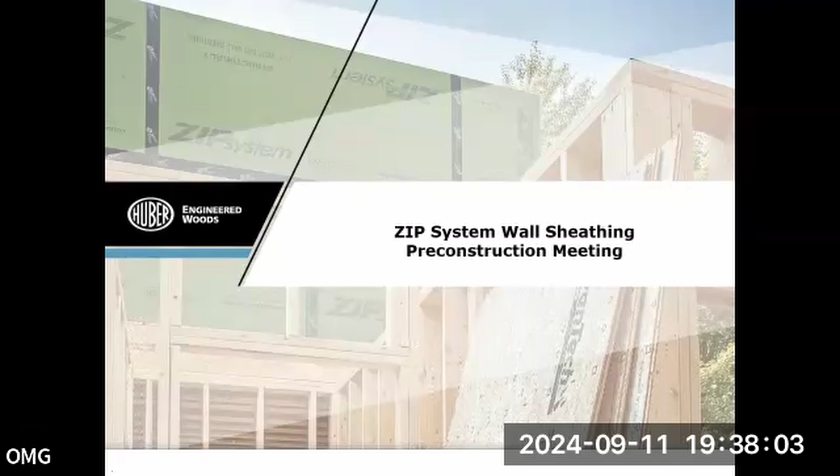We got our start as an organization, probably a 40 to 50-year-old company at this point, HEW. But HEW is a smaller subsidiary of J.M. Huber Corp, which is a 140-year-old privately held company, right? Very old for America, very old company. Got started in the chemical space. We're big believers in ethical behavior.

Everything we do is to solve a problem. Our first product we ever launched really as a wood company is called AdvanTech. It's a subfloor panel, it's OSB. But the problem you had with most wood panels at the time was that they were made with water-soluble resin. So during the construction process of a new structure, there's going to be water that sits on that house. Doesn't matter if you're Ryan Homes and you turn the house over in 83 days, or if you're some custom builder and let it sit for 1.5 years between foundation and when you close, that panel is going to get some water on it. And the issue was that water, if it's a water-soluble glue, will rinse out of the board if you let it get wet for long enough or wet enough.

So we said, there's got to be a better way to do this. We started putting basically hydrophobic resins in with wood. And turns out if you do that, you can get panels that can stay outside for long, long periods of time and still basically be structurally brand new.

That's how we got our start. And everything we've done since then has been: this is a problem, let's figure out how to solve it going forward. We believe in ethical behavior and trying to make the world a better place, mostly through better products.

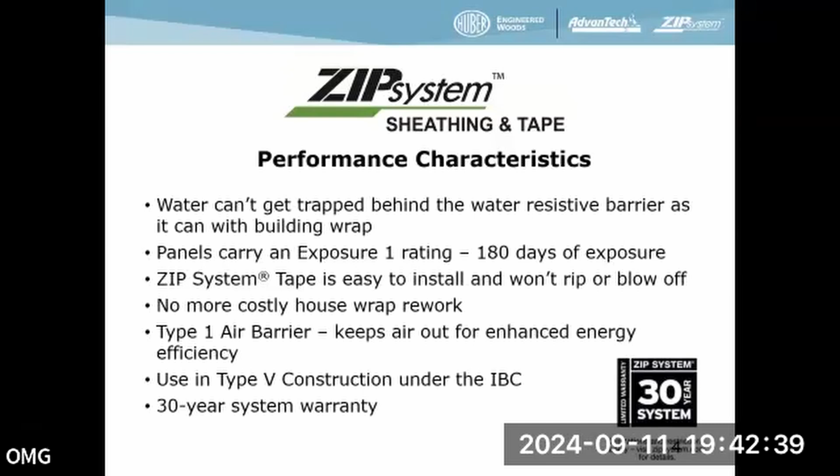Tape - we oftentimes see a zip system with Tyvek tape. Yeah, that's a bad idea. So there's 3 different species of tape.

The first species I used to see was asphalt - I used to be a roofing guy for a little while. There's asphalt tapes, there's butyl tapes, and then there's acrylic tapes. I used to think acrylic tapes were garbage, and the reason was because the only acrylic tape I was aware of at that point in my career was the house wrap tapes, which look basically like packing tape.

So you're gonna mail something to one of your cousins or kids for Christmas - the problem with that tape is it's only 0.8 mils of adhesive. So if you have an acrylic tape that has more adhesive, it'll stick better.

Asphalt tapes off-gas. They get warm - it doesn't matter whether they're covered or not, the fact that they get warm means they're going to off-gas. And when they off-gas, they start losing a lot of the capabilities that made them good tapes to begin with. So if you've ever pulled out a window or worked on a roof with an asphalt tape, after a certain amount of time it's extremely brittle. You know, there's that whole saying: there are two kinds of windows, those that leak and those that will leak.

You have this issue with tapes that are not long-term durable, even once they're covered. Butyl tapes are okay in some cases, but most butyl tapes aren't 100% butyl. They have other additives in there, and when they have other additives, they still tend to off-gas. Normal butyl can be long-term dimensionally stable. This is what I thought was the gold standard of tape for the longest time, the butyl tape.

When you get an acrylic tape, though, its weakest point is when it's first adhered to the board. When you put it on the board, that's the weakest it'll ever be. Whereas with every other tape, you take a piece, put it on there, and pick it up, it's lost almost all of its adhesion capability. If you try to put it back down, you're going to have major issues.

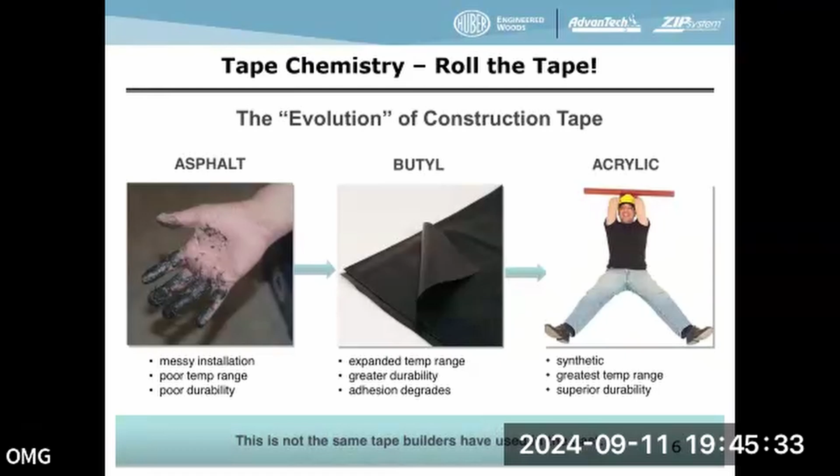When you first apply the tape, people tend to just smooth it on with their hands. You get about 40% of the bonding adhesion you're going to get that way. If you want to increase it, the best thing you could possibly do is roll it. People think they can just push it on with their hands because they're a mason, or a carpenter, or they've been working for 40 years and their hands are hard. It doesn't matter.

Your hands have fat, your hands have flesh. Have you ever tried to press out cookie dough with your hands? If anyone's baked cookies with kids, a spouse, whoever—you try pressing it out and you get really uneven results. Take a rolling pin, even without a lot of pressure, and you get it much more even. The reason is your hand yields—it's not consistent, it's got fat, it's got flesh, it's not all bone.

If you look at a panel, or really any surface, under a microscope, you'll see it's not flat at all—it's got all these ups and downs. What you're trying to do is take all of this adhesive and push it in. This tape is about two-thirds adhesive. It's 12 mils thick, and 8 of those mils are adhesive.

That's 10 times the amount of adhesive you'd find in a roughly equivalent house wrap tape—Tyvek, Typar, things of that category. What you're trying to do is push all this adhesive into all those little nooks and crannies, like an English muffin—just get it all in there. If you just push it on with your hand, you're not going to get that. So you roll it, and even with a relatively moderate amount of pressure, about the same as you'd use to paint a wall, you can get a lot of those nooks and crannies filled in.

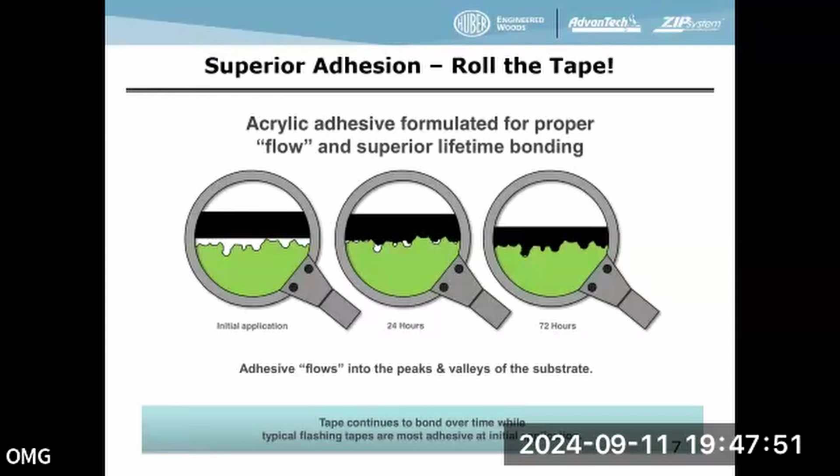There are lots of rigid rubber rollers out there for various different scopes in the building industry. There's no reason you couldn't use one of the ones used for welding rubber roof membranes or other things like that. So the taping is important. Rolling the tape is the most critical part. You can get all the other details wrong, but if you roll the tape, you're probably in pretty decent shape.

So what we're going to do here is run through this real quick. This is our commercial installation pre-con. We go through this with people when they're about to build an apartment complex. The main idea behind this presentation is we're going to talk about all the details that could be out there, all the areas where you might have a trouble spot, so you can talk through those details. Then I have a little quick presentation afterwards that says, if this is going wrong, this is what you do. So we'll go through that.

All wood panels are supposed to be gapped. These are wood panels, nothing particularly special about them. They're a little stronger, called a Structural 1 panel, so they're stronger than a typical panel you'd get in the industry. The biggest difference is if you push on the panel in between two studs, it's going to bow less. It's more rigid. It has slightly better resistance to racking. So you do get some values, but this isn't a high seismic load unless you're building in a couple key areas or out near the ocean.

In this general area, that wind loading isn't even that big of an issue. So mostly just remember, treat it like it's a regular wood panel, you'll be fine. It's stronger than that, it can handle more than that, but just treating it like a regular wood panel will be okay. And almost all this stuff around gapping is code-based.

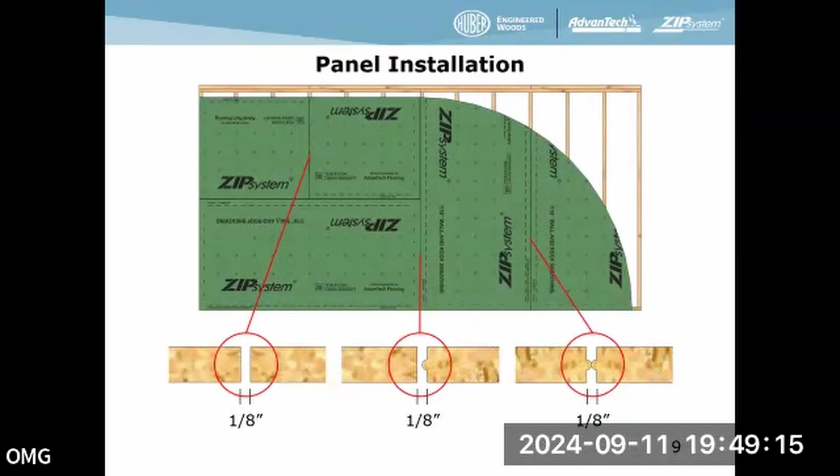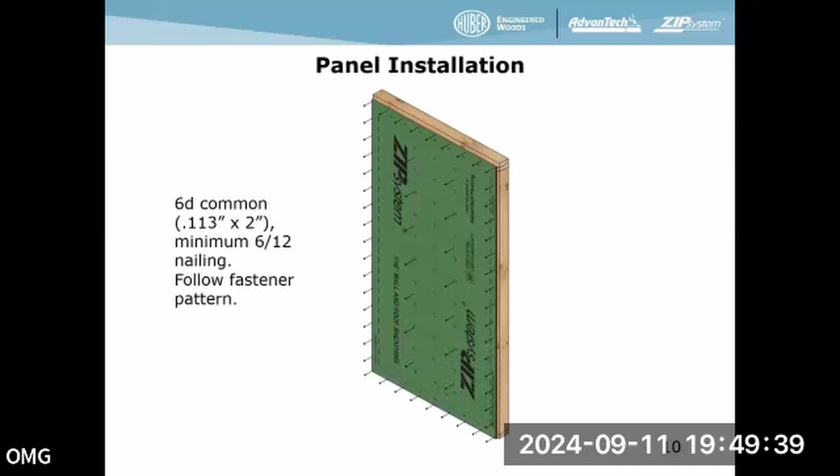The biggest complaint we hear, the biggest headache from inspectors and code officials and people who do code inspections on houses for whatever municipality they're in, is overdriven fasteners with our system. So this is the logic behind this complaint: your WRB is here, your wood panel's here, your studs here, right? If that fastener penetrates through the WRB at all, even a little bit, it's going to cause issues. You're going to get moisture into the envelope, there's going to be all sorts of problems. That nail needs to sit at best flush or on the surface. This is the logic that is there to protect the WRB.

It turns out it's nonsense. If you do any real testing around it, the amount of pressure you'd have to put on this nail head would be the equivalent of having 20 feet underwater. And if you have, I forget what it was, like 20 inches of rain per hour and a 230-mile-an-hour wind on an unexposed surface, that will also cause it to leak. It turns out if that's the case, you have much larger problems. So it's not a real world test. You can make anything fail, but the level this stuff fails at is really, really high.

In a real world application, we pay out anytime there's an insurance problem. People look at our panels, there's some kind of failure with a floor, wall, whatever, and people are concerned about its performance. We almost always just write a check. We aren't legally required to. I'm not going to say we should do it - we probably shouldn't write some of the checks that we write, but we do. We want to take care of people. We believe in our product, we stand behind it. We have never, in the entire time this product has been available on the market, written a claim on an overdriven fastener, ever.

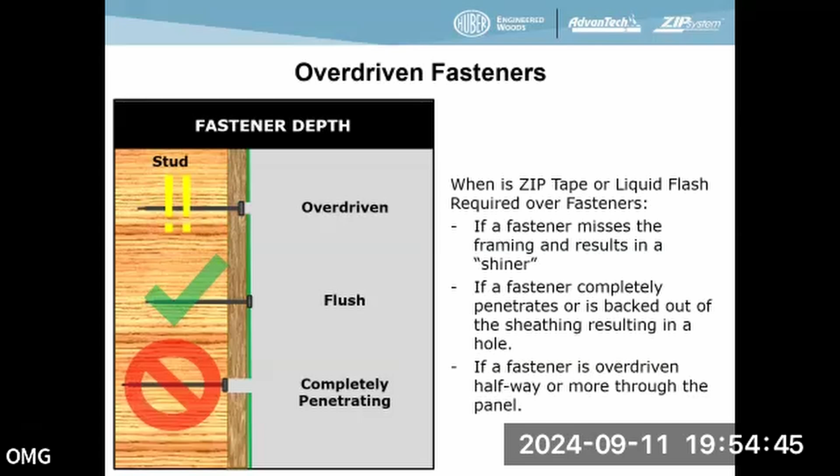When people are installing tape, almost all these details involve tape—you're going to get sick of looking at tape. But there are two kinds of joints where tape comes together. Any T-joint, you want a 1-inch overlap. The easiest way to think about it: there's a seam behind here, running this way, with a seam right here. When you take the vertical of that T, just stop it at the seam and run this across. There's plenty of slop in there, but the rule is you need at least 1 inch.

For end-to-end joints, use 3 inches—the best way to think about this is a slightly over 3-inch tape, about 3 and 3/4 inches, making it roughly a square. So visually, when you're looking at it, it's about a square when you stick the tape up and run it along. You'll be fine.

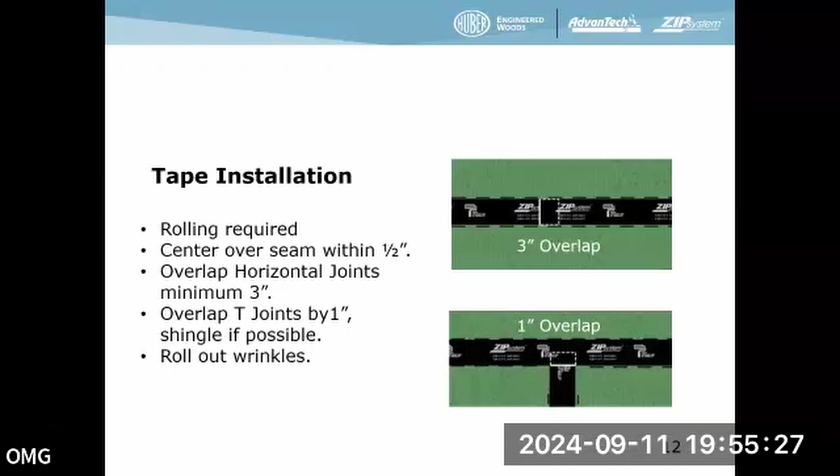This roll of tape is gonna be on everything because it's the most important part. If you don't roll the tape, you're likely gonna have issues you would not have otherwise. And if you do a lot of other things wrong but you roll the tape, there's a pretty decent chance it won't actually materialize into a real issue.

This right here is the worst taped thing on any wall. On any wall you walk out, you want to know whether the guy or gal installing that tape knew what they were doing when they did it. You'll look at that corner and see how well it's done. It'll be tight to the corner, and there won't be a lot of wrinkles.

One of the things that tells you they really understood what was going on, they probably were trained by someone at one point, is it won't just be one long piece running top to bottom. Turns out that's really, really difficult to do on an inside corner. They'll do it in about half wingspan lengths, 2 to 3 feet. You see a bunch of 2 to 3 foot sections that are shingle lapped. They start at the bottom and work their way up the wall, and it's nice and tight into that corner without a lot of wrinkles. That taping crew knew what they were doing.

I'm not saying you back off, but just know that's what that means. This is a really good indicator. You want to save yourself some time, start there. Just go find an inside corner and see how well they did with it.

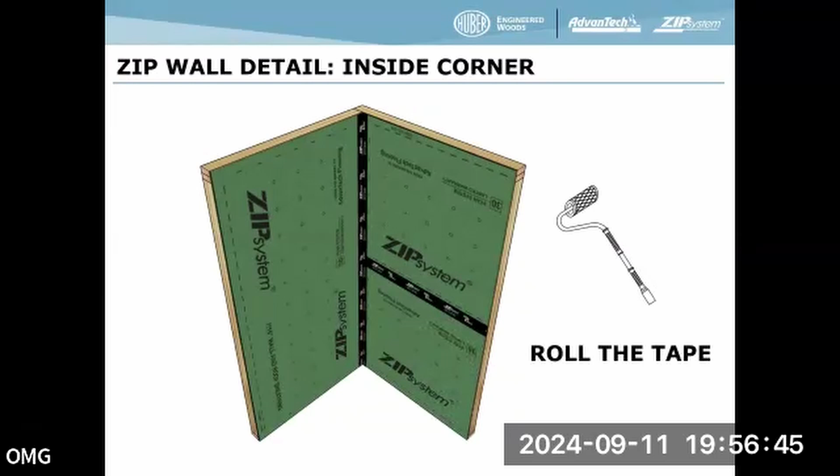Outside corners are much easier. You just tape down one side and then fold it over onto the other side.

One thing you'll see with this, and this started to become more relevant as the energy codes are changing, continuous insulation is becoming more prevalent, especially in DC and some of the higher end communities around here. We have a product where it's the zip panel and it has a polyiso insulation panel on the back of it, so it's installed as one panel that gives you your continuous insulation.

The biggest issue with these outside corners, once they start using continuous insulation, is if you butt two panels together, you start having this void that's not a nail base. That polyiso foam is relatively rigid if you push against it, but it's not something you can nail into. Nails just pull right out.

So what do you call that material? It's a continuous insulation panel. It's a zip R, R sheathing, R value. So zip R - that's the biggest issue we're dealing with on outside corners.

Outside corners are relatively easy to do. You can tape a 40-foot corner with one piece of tape if you wanted to, if the person had a ladder and was willing to do it. They'll take one side and come down the other, but in general, not a huge area for concern.

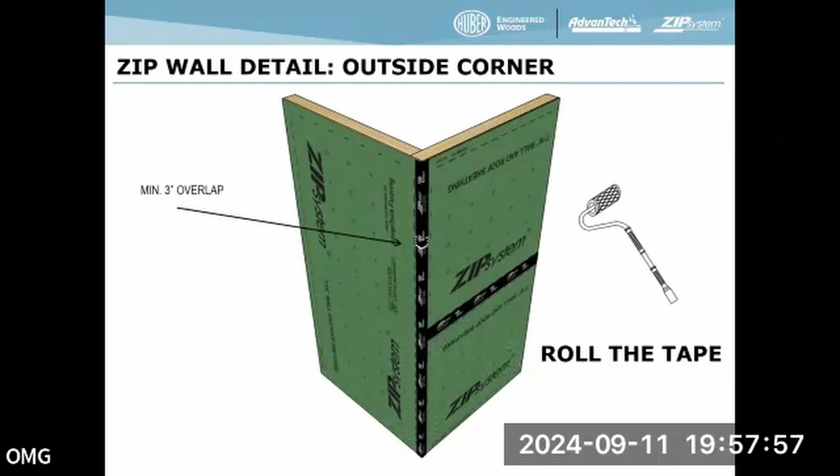Just like the regular seams, once you start having penetrations, anything bigger than the rule of thumb we have for what we call flesh wounds - so you have a cut in the panel, and you can't cover it with a quarter or your thumbnail, you should tape it. When you can see the wood through the green, even if it doesn't go all the way through, you should tape it.

Sometimes that's someone got a little overzealous with a compressor and put a bunch of nails in one area, managing to break off a flake of wood in between them. Maybe someone used it as a sawhorse and put a big old gouge through it. Maybe someone got a forklift and punched a little hole through it.

If you start getting less than 2 inches in diameter, you can just repair it with tape. Once you start getting bigger than that...

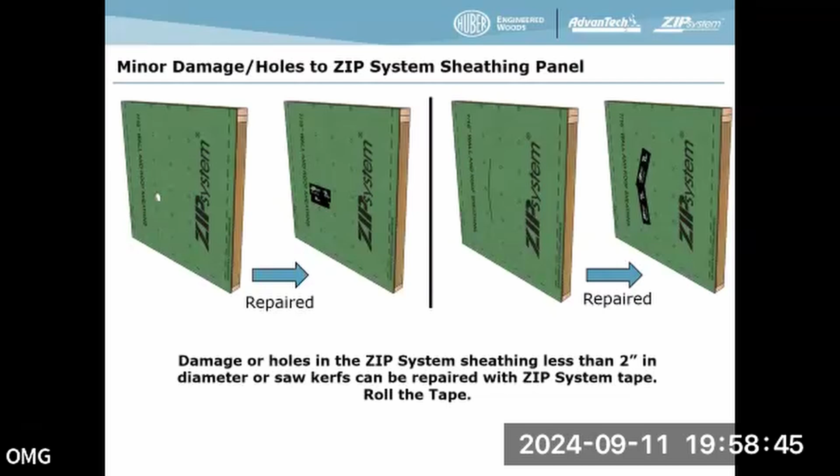It's time to start removing a section, blocking, and installing a whole new piece. Our rule is basically, if you can put your fist through it - or sorry, if you can't put your fist through it, you can probably just tape over it. Anything bigger than that, you're going to start needing to cut out a section and retape it in.

One of the worst cases we see for this is up in the top of gables. They build a house and install the panels on the ground on the end truss. They will then punch a hole through it, like with a hammer, with their fist, headbutt, or whatever. Then they'll put a chain through it, crane it up, install it normally, and it'll all be taped already.

So they don't got to go up there with tape to fix anything because it was all taped on the ground. It's a great idea, by the way. But then they get up to the top and there's this hole that just sits up there. Now you start talking about like, well, it's technically in an unconditioned area, into the attic. Are we worried about the air? Are we worried about, there's all these sort of what ifs. Don't do it that way.

Have them cut the top section out, remove it, tack it right below where it's going to go back in, just cut it. Then when they put on the roof sheet and the guy leans over, he's already tied in, already up there installing it, leans in, pops the thing off, puts it where it's supposed to go, nails it, takes off the tape, puts it down, rolls it, and walks away from it. He's already up there, it's already easy. He doesn't want to bring a saw up with him, so just cut it when it's on the ground, tack it right next to it, be super easy.

Again, you see a detail like that, that means that crew's done this before. That means they've thought about it. They've really, and they also care, not just that they've done it, they care to get it correct.

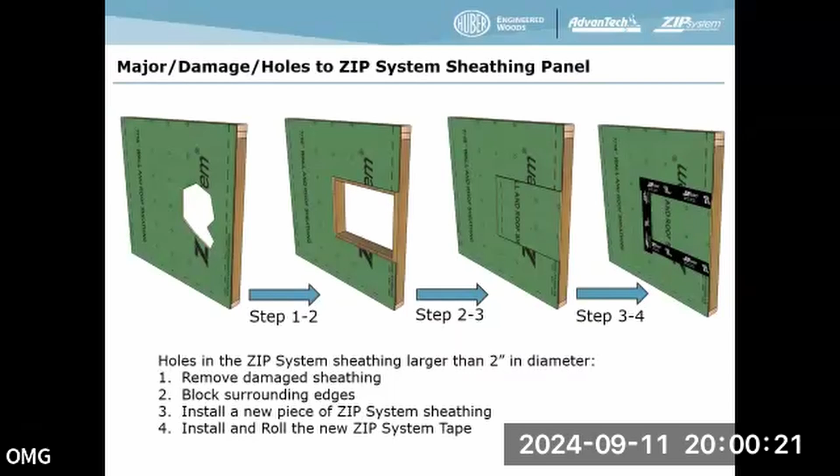Yeah, this is one of the bugaboos of the industry. There's not really an official code requirement on how you treat this area on any wall, right? What do you do when the wood comes down and meets the masonry?

Mostly around here, it's like basements, not so much crawl spaces. There's some, but you get on the shore, you'll get more of those pier-based systems. But right here, there's a bunch of things you can do.

Best thing, really, is liquid flash, a fluid applied system. Cover that joint. Tape's not really going to adhere to the masonry very well. It will if it's dry and clean and free of debris. That's no concrete I've ever looked at on a job site would meet any of those requirements, let alone all at the same time. So you can do a couple things.

Fluid applied will stick to brick and masonry just fine. It'll stick to you just fine too, so be aware if you use the stuff, it's messy. You're gonna have a gray splotch if you get it on your arm for at least 2 weeks. But the other thing you're getting when you use the fluid applied is it's helping with your air barrier.

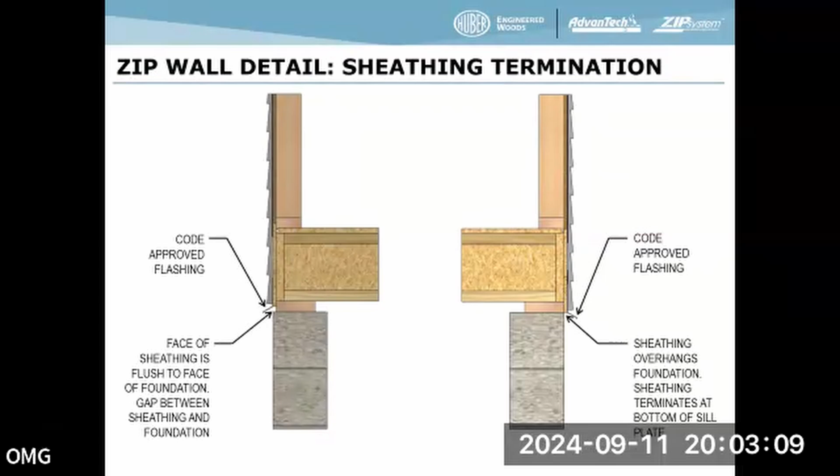If they put a sealant down below the sill seal and on top of the sill seal, it will keep it relatively airtight. If they don't, you could spray foam behind here, that will also help solve that problem. Or you could put a WRB compatible flashing that also breaks up the air movement, which is what the fluid applied is. So there's a lot of ways to skin that cat.

I'm going to flip through these because it's a lot of the same stuff. There's basically three kinds of things you can use to tape a mechanical or physical penetration, like a beam, a pipe, a wire, or an HVAC conduit or vent.

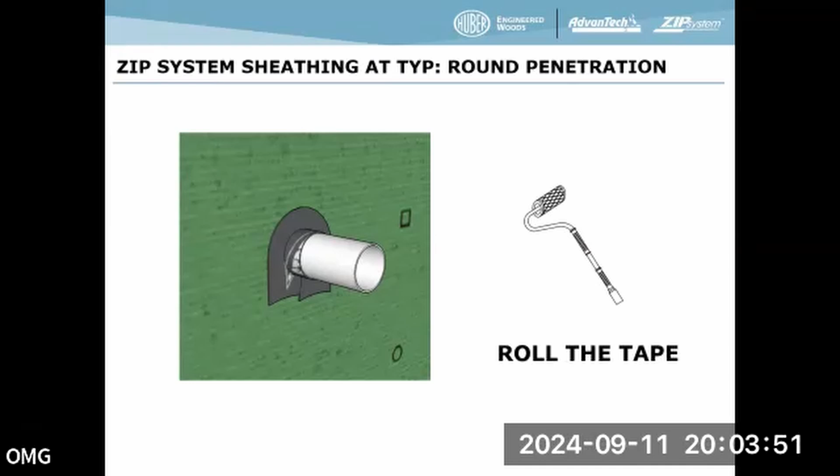You can use a regular seam tape if it's flanged, a non-flexible material, with just one or maybe two planes, like an outside corner or inside corner. You can use stretch tape, which you can bend any way you want and stretch to 2.5 times its original size. Or you can use one of the fluid applied systems. Any will work, they're all pretty compatible. It's mostly just understanding how to do it correctly.

This is a reasonably well done joint, coming out of the wall. You need one inch onto any surface in order for it to be a good bond. It's a good rule of thumb, and it applies to almost all our products.

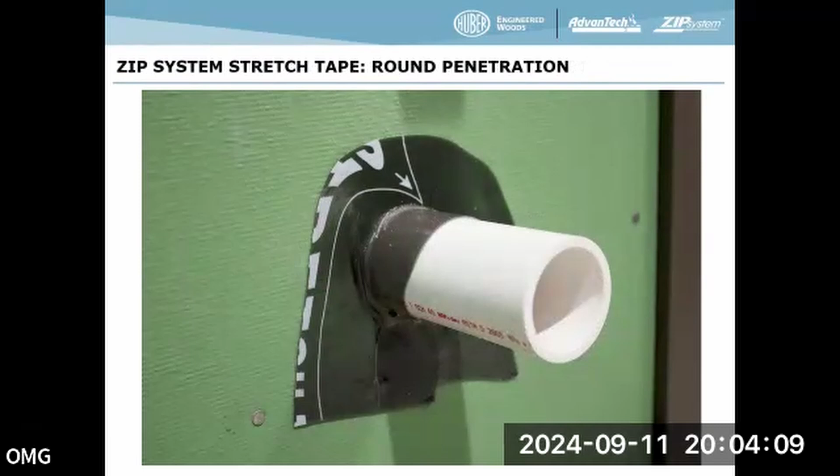In this instance, they're going to use a seam tape because that is a flanged box. You don't want to use seam tape if it's a round opening or an unusually shaped opening. It's just not going to work really well.

The biggest visual difference, if you're walking behind someone trying to figure it out, is if it's a big enough piece it actually says stretch tape on it. That's a really good indicator. The other thing is stretch tape is sort of translucent, though it's black on a roll, so looking at it you might just think black. They're the same thing, but the stretch tape is much thicker, like three times thicker than the regular seam tape.

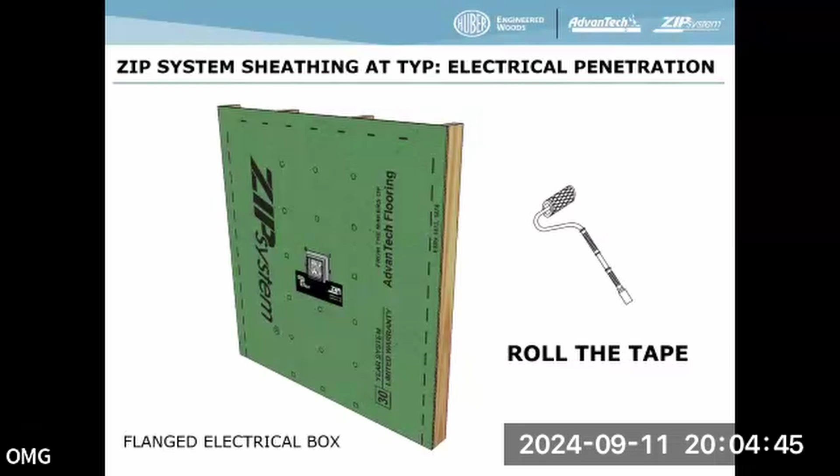So there's usually seam tape you can see somewhere nearby, and you can tell whether this is thicker. And the other thing is it's got this sort of translucent quality, you can kind of see through it a little bit better than you can with the regular seam tape.

With this kind of thing, with a flange, to the extent that you can, it's always a good idea to shingle things out. So bottom, sides, and then top. And then that's it, you're good.

So again, it's flanged. This is a perfect application for using the seam tape. I'm going to try and put these a little faster, just so I can slow down a little bit here.

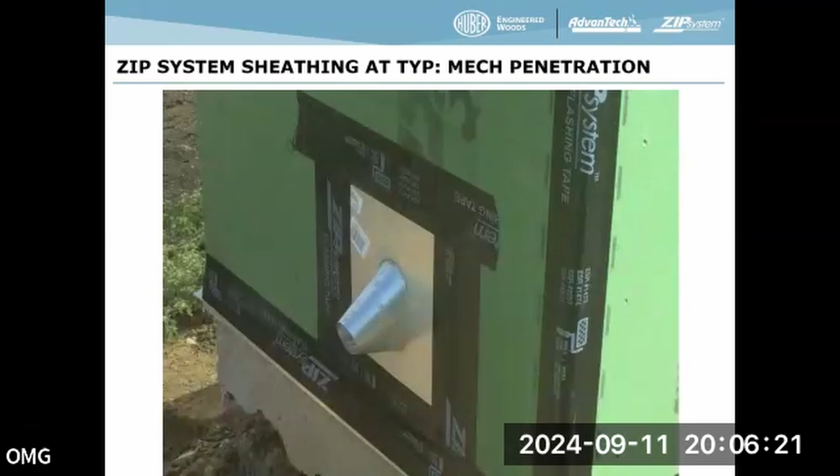Very similar detail to what we looked at a moment ago. Tape it in, this is a real world application for that. This is if you have a beam that goes through. This is a stretch tape, it's a lighter color in this, it's how we show it in the slide. This stuff is really easy to install on weird shapes like this.

You take the tape, it's got a backer on it, you peel the backer off, fold the tape over so the non-sticky side makes it thinner, drape it over whatever it is and start working it on the main wall. It's really easy to get right. If you see it's not a stretch tape, it's much more likely that it was installed in a way that was just good for the wall. This is what that looks like.

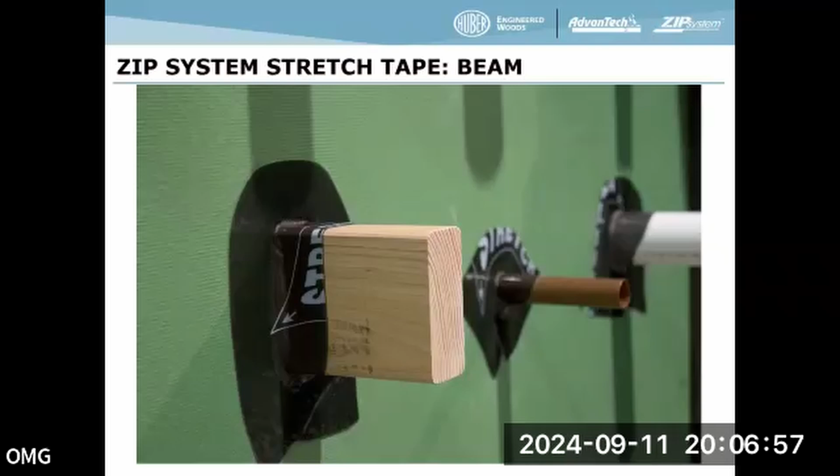Transitions, like I said, our tape's great. It sticks to wood, it'll stick to plastic, it'll stick to metal, it'll stick to other wood, WRBs, all sorts of things you can integrate it with. It'll attach to other house wrap products. If you have to integrate like an addition or something, and there's house wrap on one part and zip on the other half, you can tape to house wraps and it's fine. It's the same kind of adhesive most house wraps use.

This is an area where you are not going to get a good bond with tape. Any kind of masonry is not going to go super well.

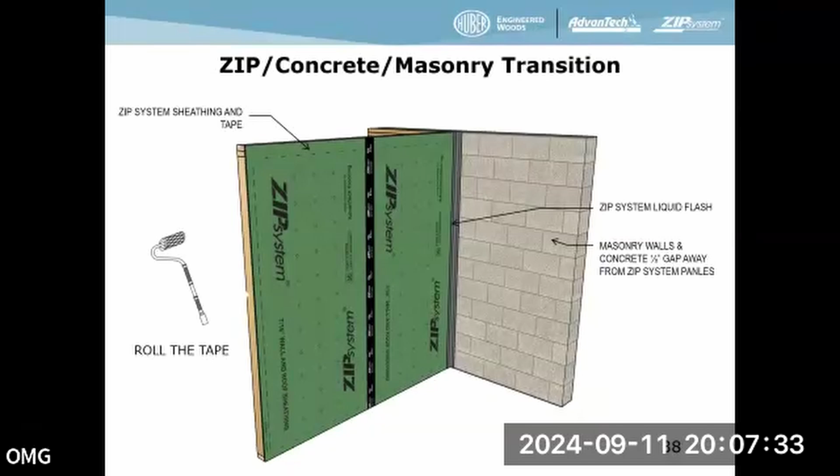You're going to want to use a fluid applied product in this instance. What that looks like is you're going to have some kind of gap, because code requires that you can't have non-pressure treated wood in direct contact with a masonry product. They'll just trade moisture back and forth to each other. The masonry will be okay, but the wood product eventually will not. It'll eventually rot, so you leave a gap.

Our fluid applied stuff is a very, very expensive gap filler. It's much easier to just stick in backer rod and cover over it with fluid applied. But fluid applied is definitely the joint treatment of choice when it comes to masonry and wood joints.

And how is that applied? Is it brushed on? Is it like a caulk gun? Great question. It comes in caulk tubes - big caulk tubes, little caulk tubes, and sausage tubes. It comes in all those versions. You caulk it out - it's basically the consistency of peanut butter, and just like peanut butter, it's a different consistency outside in December versus in August, right?

So it comes out, and then you sort of tool it into place. Don't use your finger - use a plastic putty knife, use a plastic spreader. You can also just take a bristle brush, cut it really thin back, for the kind of inside corners we were just looking at.

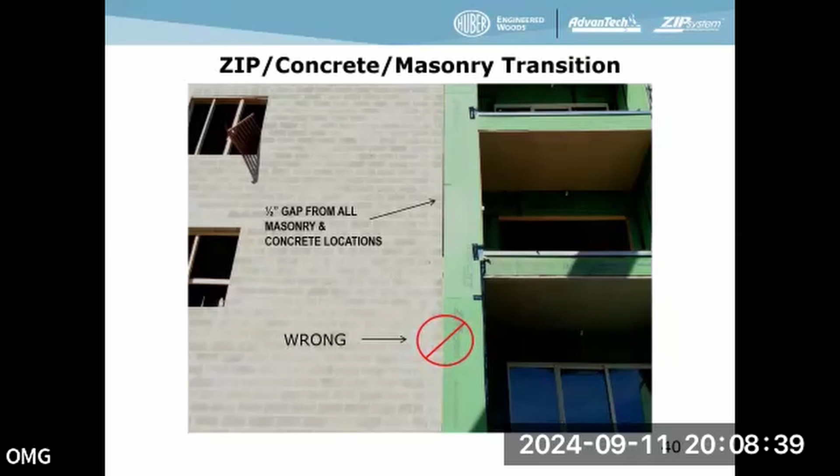You could take a water bottle, like one of those Deer Park water bottles you find on any job site in North America, and use that as a tool to run it down on the outside. You can take a spoon out of the roach coach you were having lunch with, rinse it off, and use it on there - it'll do a really good job too. It doesn't have to be anything fancy. There are actual tools designed for it that work well, but really you're just trying to smear it out a little bit.

The way you know it's on thick enough is you can't see through it - it's a dark gray color. If you can't see the green through it, or the wood, or whatever it's over, then it's on thick enough. And it'll stick to everything - like I said, it'll stick to you if you get it on you.

The one downside with this is it's a moisture curing product. So that's great if it's raining - oh, there's a leak, I need to fix this leak, I know where it is, I can see it right here. You don't have to worry about coming back when it's dry, because tape won't stick if it's wet - the tape needs to be dry, the surface has to be dry. This stuff, go for it - put it on there, the water will actually help it cure faster.

The downside is that moisture is necessary for curing. So in January, when the high temperature is 33 that day, there's not enough moisture in the air to allow it to cure effectively. Install this in April, it'll be cured in 6, 7, 8 hours, maybe fully - definitely the next day when you come back it's good to go. But install this in January, it might be on there too long to really have a good cure process. The way the weather's been going lately though, there's usually a week where it's above 40 - you get a couple days above 40 in a row, it's okay to install this stuff. That's what we recommend: ambient air temperature over 40 that day, and you'll be all right.

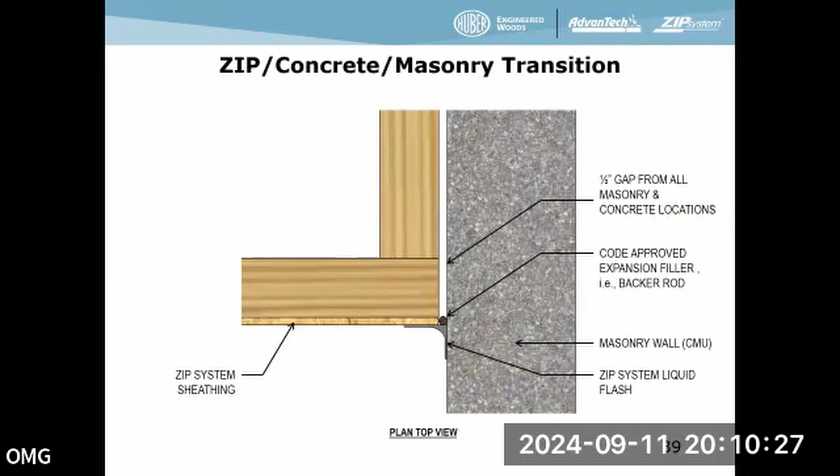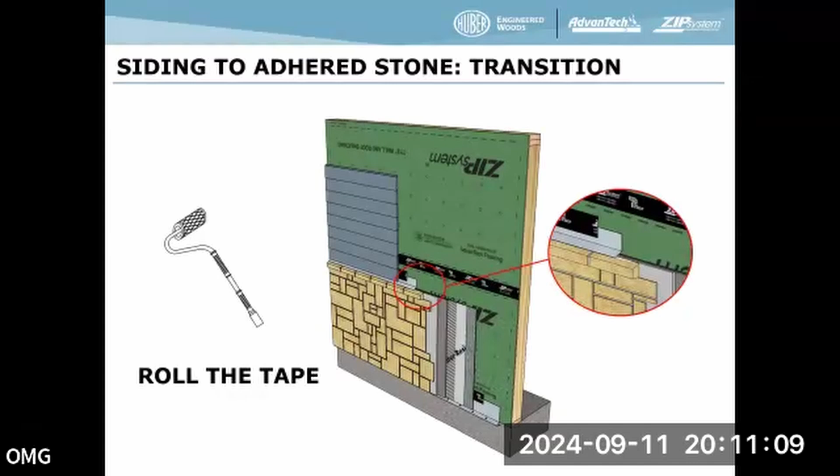So you can put anything back there. You can stick with this - what we have here is just like a water table, top of the masonry kind of flashing. You do this with step flashing too.

This is the most common place to see someone use a non-zip tape. If you look at a wall with a bunch of zip tape on it, the windows are zip tape, the zip is zip tape. The place most likely to not have zip tape is the flashings along the roof line, because the roofer did it, since it's a different installer.

That's one of the issues we see with new zip builders: they don't talk through all the people involved, because you don't think about how many people will touch an envelope until you're doing it. The framer touches the envelope installing the structure and taping the WRB. Then you have the window installer, who might be the same guy as the framer but not necessarily. Then the mason, probably not the framer at all. The siding guy is probably different, the roofer is definitely different, and then HVAC, electrical, plumbing, maybe even a deck guy or railing people—all these people are going to touch this in some regard.

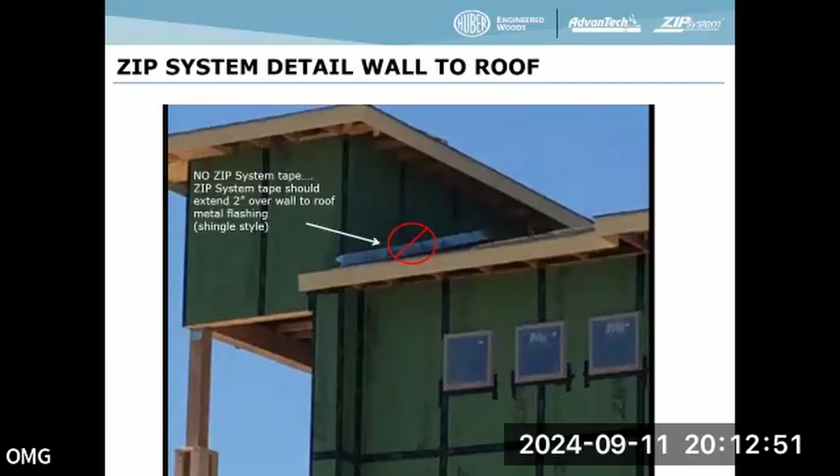Understanding this, the GC or project super needs to have a conversation with all the different trades: when you put a hole through this, it's your responsibility to handle it—I'll help teach you, but you need to fix it. That's something a lot of new guys don't do. Then we come back out for what we call an observation, where we find stuff that's wrong and you have to correct it. That's normal, we're used to walking builders through that, but it's much better if we can get ahead of it with the builder and framer beforehand. The odds of a correct install go up dramatically.

Again, just another through-wall flashing detail, this one over decks. This is how I got started in the industry, building decks, so I'm very familiar with things like the little kickout flashing being installed there.

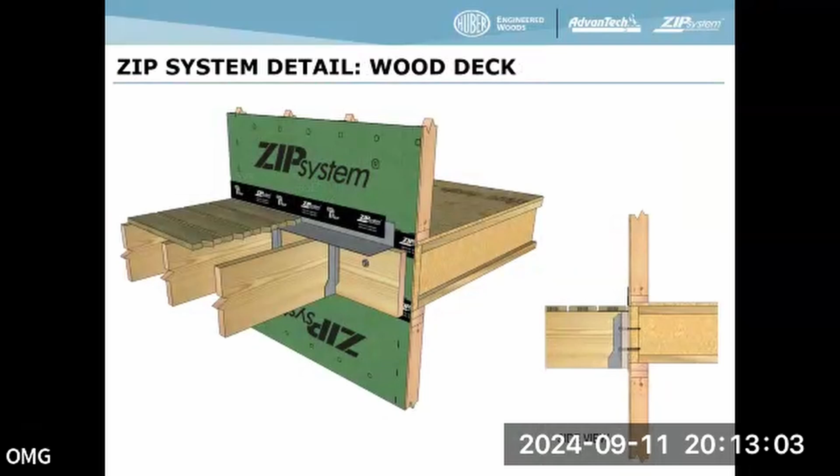You're gonna have a poured-in concrete porch. It's a really good idea that whatever Vycor or felt paper you're using to separate that masonry from the wood behind it, you tape the uphill end. Otherwise, any water that gets behind that is just going to sit there forever, and you'll completely defeat the purpose of having that vapor or water barrier.

Parapet detail is not super common in residential, though it's more common than it used to be. Flat roofs are the most likely to leak of any roof type I've ever come across—I used to be a roofing guy.

Getting this parapet detail right is belts and suspenders and cummerbund and like sewing the pants to the shirt kind of deal. You have a whole bunch of redundant things that would all have to fail simultaneously to get water to infiltrate. Because if it does get in there, it's really, really bad—it'll completely destroy that entire wall.

So you start off by making sure you tape the zip all the way around, put a piece of tape on top. We make tape that's 12 inches wide, and most walls aren't 12 inches wide, so you can effectively cover over the top of a parapet with zip tape.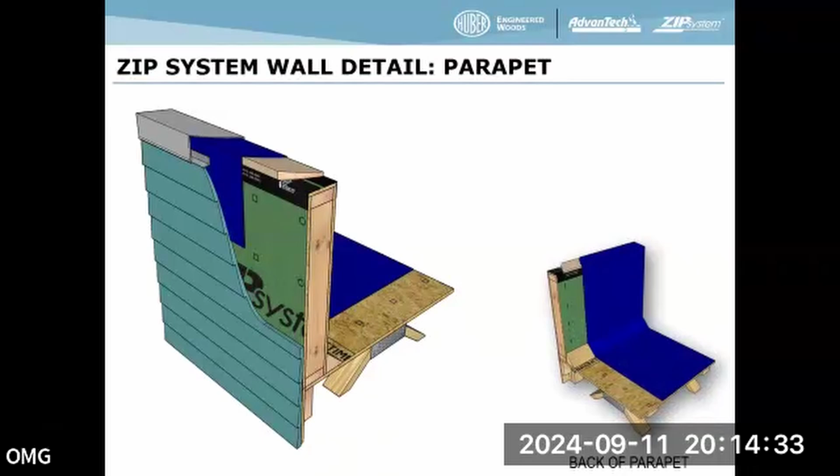Then it's usually a good idea to put some kind of physical positive slope there, lapping the roofing membrane over the top of it, and it's a really good idea to have some kind of metal cap detail over all of it. A number of things would have to fail for that to go wrong, so you can be more confident in it, but it's one of those areas that if we see a parapet detail, we really hone in on it because there's a lot that can go wrong.

When it comes to zip window installation, really these are the window installer's details—we just have our version with our tapes on it. We use our stretch tape to fill in the sill, and you want it to go up at least 6 inches on a side. Every once in a while you'll see they cut a piece long enough, but it's lopsided.

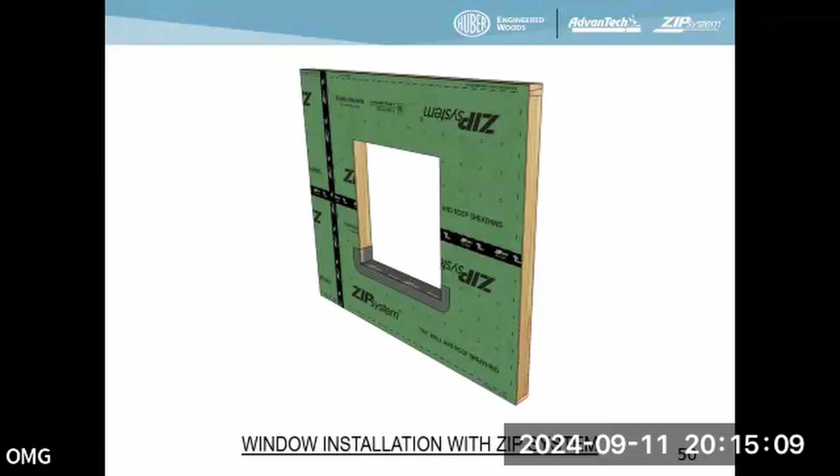It's 2 inches above the sill on one side, and 10 inches above on the other. But the good news is you could just take a piece of tape and extend it further up, and that's completely fine. There's a lot of easy ways around that.

But then roll the tape. Most windows are going to require some kind of sealant behind it. This is for a flange window. You don't tape the bottom of it. You want to allow enough of a gap that if any hydrostatic pressure develops behind there, because there's actually water in the window system, it can drain out the bottom. This is a window installer guideline. This isn't just us, we just know what their details are. We include it in our installation instructions.

So we do deep dives about every, I don't know, 5-10 years on our products. We like to look and say, okay, we love it, it's great, everybody thinks it's awesome, but what's the but? You always want to know what the but is. You know, Curt's a great guy, but he tends to talk too long.

The framer comes in, he installs a zip, he tapes all the joints, right? Then the WRB's in and he walks. And then the windows take about 6 weeks to show up, because window installation manufacturing takes a long time. And so the windows get installed realistically several weeks later.

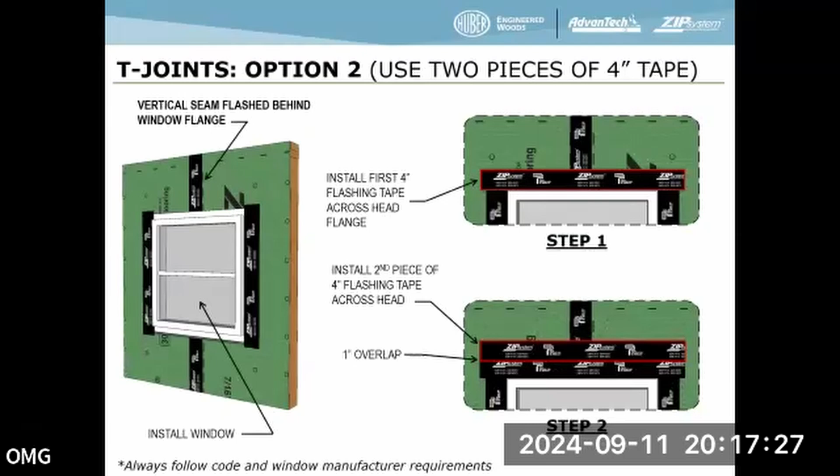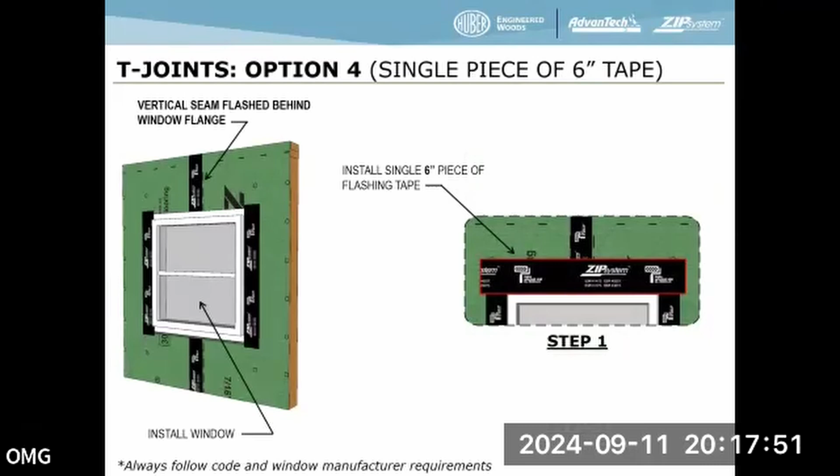You can come, this is the most popular by the way, was that hat flash I just skipped right by, the one that everyone uses. This is the most common one. They'll just put a little piece right there, and that's fine. You can use a 6-inch piece of tape, that's also fine. Like I said, we make a bunch of different thicknesses and widths of tape. Using a 6-inch tape is fine. But yeah, those are the main ones.

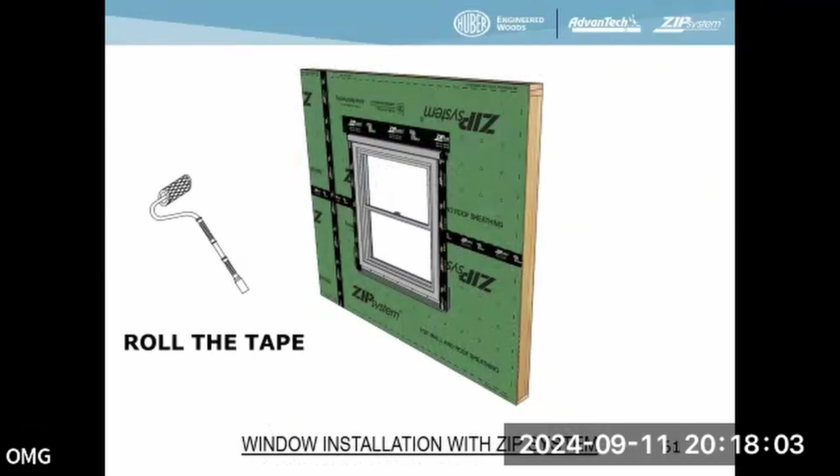Also, most window headers are going to have some kind of dimensional trim. They're going to have a kick-out flash like that and tape the uphill side of it. When you start moving over towards flangeless window installations or flangeless door installations, it becomes much more critical, that top flashing detail. So this is a non-flange door installation. It would be very similar if it were a window.

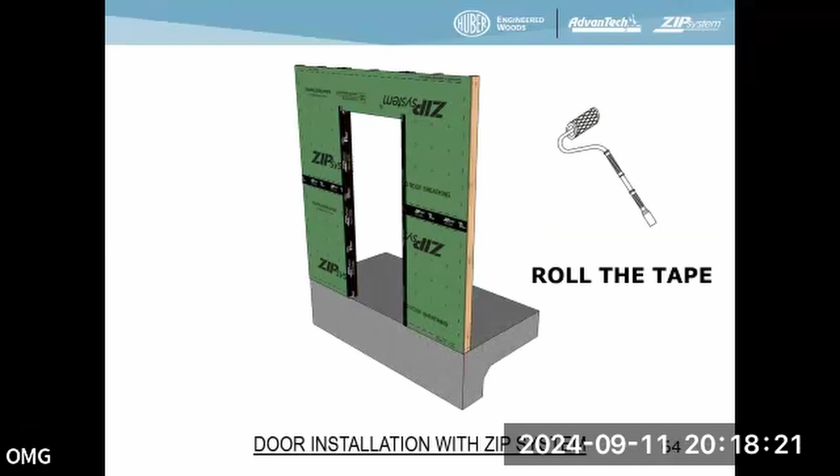First thing you do, well, if this were a window, you tape in the sill just like it was a flange window. Then you're going to tape the jamb. Because what you're relying on here really is that all your caulking details and trim boards are going to be able to keep any moisture from getting between the window or door and the jamb. Long-term, 50, 100 years, the life cycle of a structure, the odds that's going to hold up forever, not great. So you tape the jamb, and what that does when water does get in, it doesn't cause as much of a problem because it's protected. Then you do the same thing with the header.

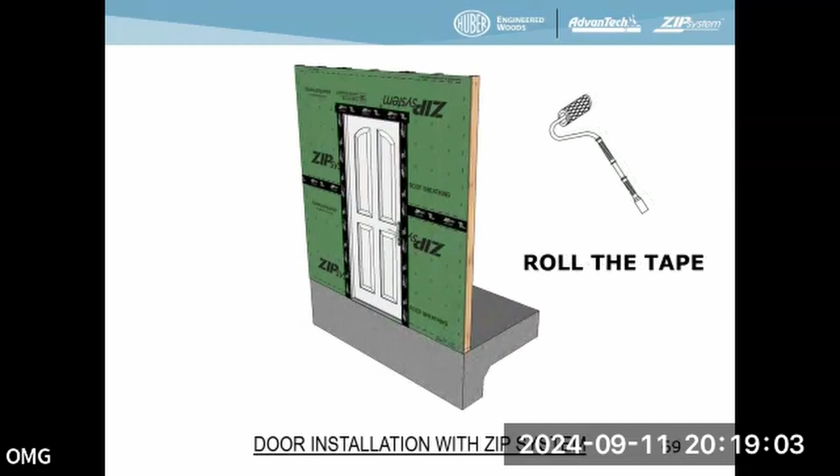When you install your door or window, you're going to tape from the zip over onto the surface of the door, on the little jambs. You'll cover this over with the brick mold or dimensional trim eventually, but it adds another layer of protection as you're installing all those boards.

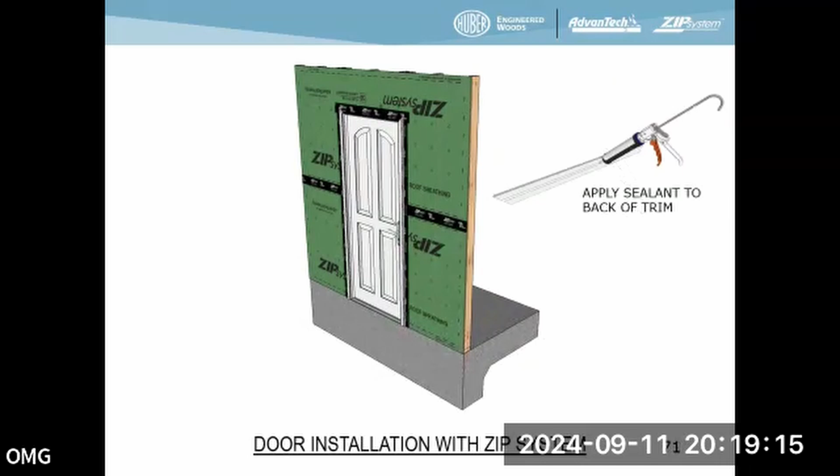Now this is the most critical part. The brick mold comes applied to the door, already installed, so you're going to pull it off and take it off. This is the most critical part.

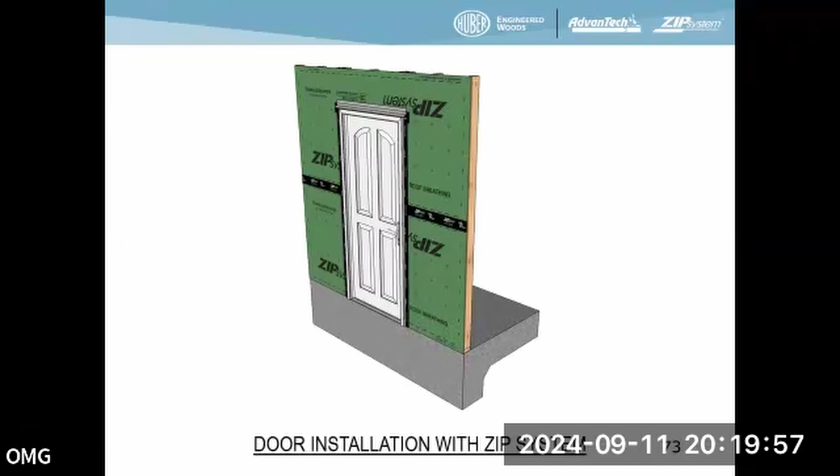We would ask people if they were going to do a job and wanted us to come out, how often do you want us out? Having a pre-con meeting is great because it helps you figure out issues you didn't know you were going to have with all these different details. We talked through them, but we should come out and take a look if you're going to do window tests or any other kind of moisture testing on the envelope.

If we're going to come out one time and that's it, just once, the best time to have us come out is after the majority of windows and doors are installed. Because at that point most of your mechanicals are through the walls, not all of them, but enough to know whether or not you're doing things correctly. Doors and windows are where most installation errors occur, so that's when we'd come out.

We have a checklist available on our website. We hand it out whenever we do installation trainings. It's about 25 things, with another 4 if you're using the Zip R product, and another 4 you have to worry about for the installation products. But there's one thing on here twice. Anyone want to guess what that is? Roll the tape. So it's really 24 things plus roll the tape twice, because if you do that, it covers most of the other sins.

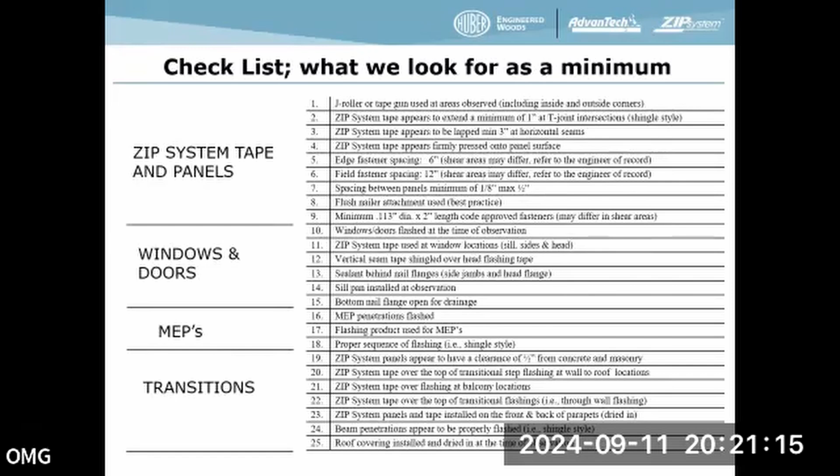All right, so this is the general installation that we do.

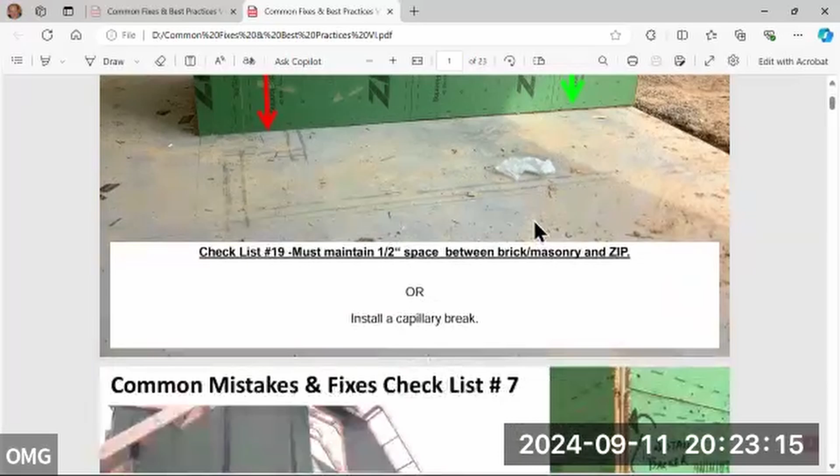All right, next thing - when we see gaps, that's one thing we'll see. We say gapping is important. Wood moves, right? It heats, it expands, it cools, it contracts, it gets wet, it moves a little bit as well. Anything up to a half inch is fine - walk away from it. If you can't quite get your carpenter's pencil in widthways into it, you don't got to worry about it. It's good the way it was.

You can just go ahead and tape it. If you can take your carpenter's pencil in widthways and wiggle it, it needs something, and it'll need probably just foam. You can put backer rod in there, cut up a little sill seal, put it in there. You can even spray in gap filler and then just trim it back if you wanted to. Up to an inch - so if you can turn your carpenter's pencil all the way over and wiggle it back and forth that way too, then you've got to put something in there that's actually dimensional.

What you're worried about is there being enough of a lever when that pressure change happens behind that tape to cause it to wiggle enough to actually break the seal against the wood and cause a potential leak issue long term. That's what you're worried about.

The biggest places we see gaps - if it was a panelized house, meaning the wall sections were assembled somewhere else, shipped to the job site and stuck together. This is something that Ryan does, it's something Cole does, it's something that a bunch of builders do, especially larger tract builders, but even custom builders will do panelization and have it shipped to the job site. And at the joints of those panels it's very common, because the foundation tolerances are crazy for how far out you can be - inches on a normal house, 3-4 inches, it's like, okay.

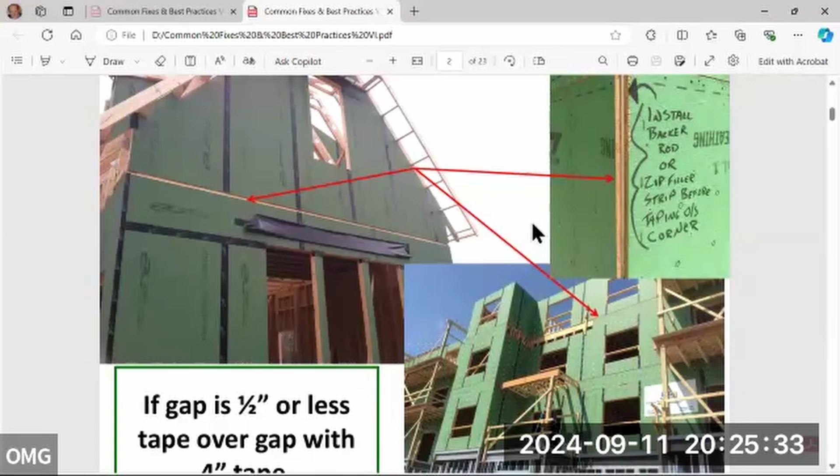That's a great question - just rip a piece of zip. It could be anything, really - any wood, any structural product. It's going to be covered up with tape anyway, so it doesn't have to be zip. It could be a 2x4 piece that you rip down for it, but most common is zip. If it's already the same thickness, you don't got to worry about it - you can just worry about filling the gap.

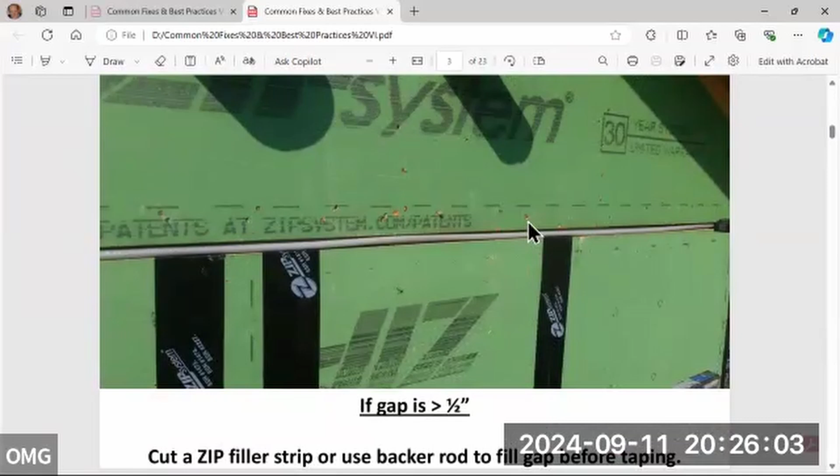Up to an inch, this is a good filler for doing the gap. Bigger than that, you're going to want to rip and put in a piece of zip. We just talked about anything up to over an inch.

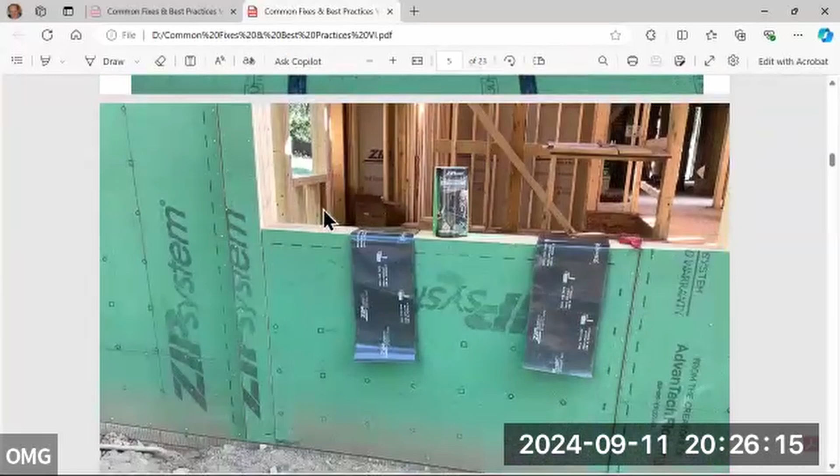One of the things people will mess up when they're doing taping sometimes is it just won't be dry or won't be clean. There'll be a lot of dust and dirt on the job site - any of this dust or dirt you see down here is going to interfere with bonding. The other thing is, it's a non-pressure-treated product - code requires at least a 6-inch gap everywhere. I think it's actually more in most places - at least a 6-inch gap between non-pressure-treated wood and grade.

So people have flower beds - what is it, 8 inches? I believe it's actually 8 or more in most places, but nationally there might be some places that were 6. This is one of those things you'll see issues with, especially during construction, because it'll get wet and water will come off the top of the structure, hitting right there, and splash mud up onto the bottom of the panels. Even if no one's stepping on it or kicking at it, it'll still get dirty in that bottom section just because of rain and gravity.

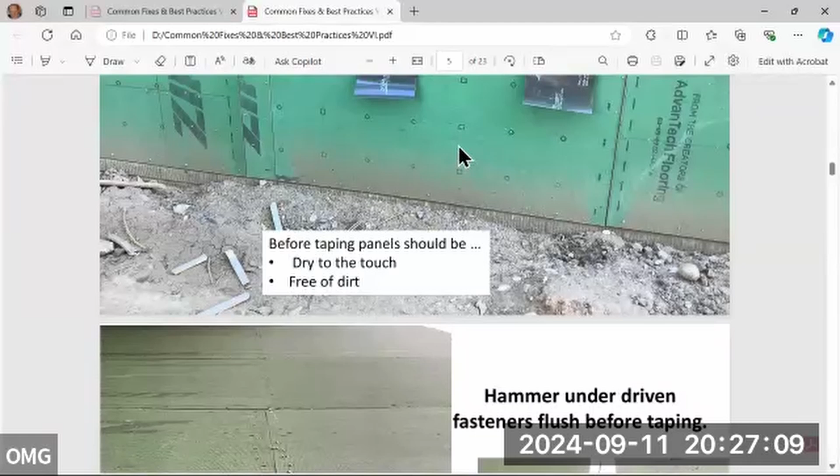Can you go back to that outside corner detail? Right there. I don't see it here very often - I believe the guy in Virginia complains about this a lot more than I do. One of the things people do is when installing panels, they'll keep the back corners of the panel touching the corner, and then you end up with a gap - basically a half inch by half inch void. When you tape over that, there's this gap behind there. If it's perfectly tight together in the corner, it's okay because it's technically under the line. But if you can see the stud, it's too big.

You've got to put something in there. I would highly recommend overlapping this panel onto that one, or vice versa - just overlap the panel. I realize framing doesn't always make that super practical, just with stud spacings being what they are, but it's definitely best practice to overlap that panel onto the other one. It's not required, but the panels should at least be touching each other for that to be good.

This is a much bigger issue on our sheathing because you have foam on the back of it, so those panels are much thicker. This panel isn't even a half inch thick. The R sheathing panel most common in this area is an R6 - an inch of foam and then the wood product. So if you just touch the butts of those two things together, the back sides of them, you get a hypotenuse with a triangle, an isosceles triangle - it's a half inch on a side, or 1.5 inches on a side. That's a pretty big gap there.

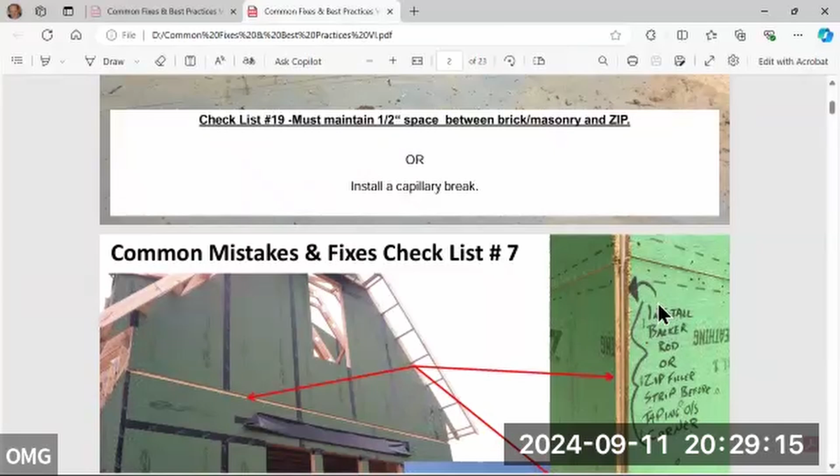What we recommend is you can just overlap them like a T, basically like an L joint. The other thing you can do is rip out 1.5 inches of foam off of one panel and just slide it over so you have wood all the way around. It doesn't really affect the insulation capability of the structure because all you're really doing is removing that last little bit that was out in the corner anyways. This corner detail, I don't see it being a huge problem in most places, but it is a problem if it's there. It's not super common anymore. Great question.

Another issue I see all the time - this is super common - is when we're nailing, people, especially county inspectors, will complain all the time about overdriven fasteners. This is absolutely a bigger issue than overdriven fasteners from a moisture management perspective on most structures. When they're nailing in, especially if they're having to toe nail to hit a stud, those nails aren't sitting flat - they're actually canted out at an angle, and there's a pretty good chance some of the nail heads are sticking past the surface of the green. They're not flush, they're actually proud. And when they're proud, if it's in the middle of the panel, it doesn't really matter.

But if they're on a seam, you're going to tape that seam, because you need to tape that seam for it to be code compliant for being a WRB. When those little things are sticking up, it's like having a whole bunch of little tent poles underneath the tarp you're putting down. Every single fastener has a zone around it where there's no adhesion to the panel underneath it. If those zones get big enough, they'll just prevent the tape from bonding in general - instead of having a fastener slightly overdriven, where you'd need a crazy amount of air pressure and driven rain to get that fastener to leak.

Anytime water gets behind that, if it was running down what were a horizontal joint and that tape had failed, you will have water in your structure.

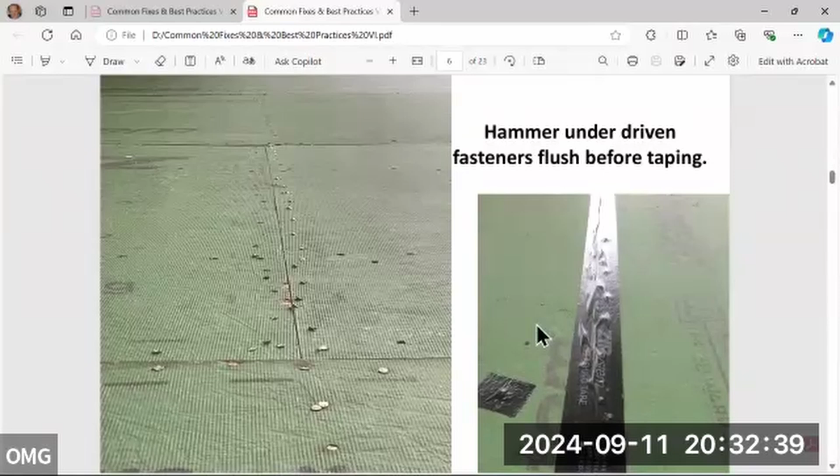But yeah, what I'd tell people to do is just bang the thing flat and then go back and retape it as necessary. You can put a whole second piece over the whole thing, it wouldn't really matter - you can just layer tape on top of it. Some people will bang it flat, they don't like it, they'll take a wider piece of tape and cover over it. But yeah, most of the time, tell them to bang it flat.

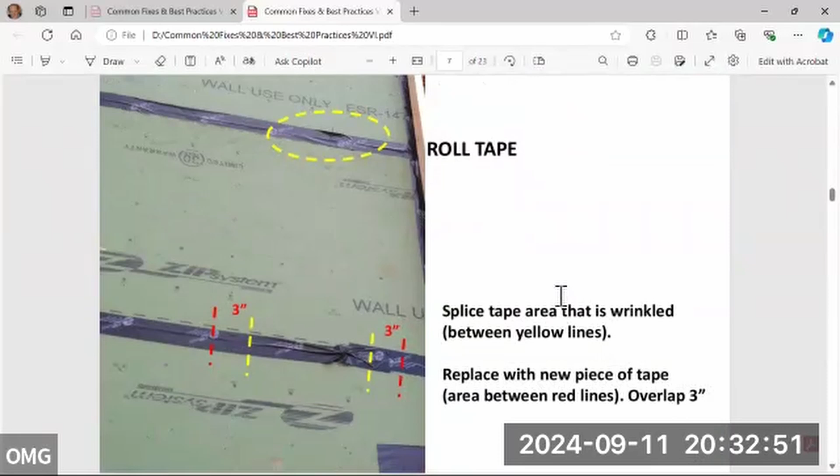So when I look at tape, there's a couple things I look for that are positives. If I see these, it was rolled enough, and it was rolled using one of our rollers, which is not necessary, but it's not bad - we like it like that. If you see Z's in it, the little Z's from our imprint from our roller, it was rolled and it was rolled enough.

The second thing is, if you look at a piece of zip, you'll see this pizza-screen texture to it. That's because when the mat of flakes with the zip on the bottom goes into the press, it's not going in by itself - it's sitting on this metal pizza screen called a platen. That platen has a little bit of texture, a bunch of interwoven metal, very much like a pizza screen. So when it presses, it leaves it there. And that's total accident - it wasn't designed this way, it's just an artifact of the manufacturing process.

Just like the slightly darker color, like the top of an apple pie, on the inside of the panel - because it's been heated a lot, so it's almost got a burnt look. Same thing with this: if I can see that texture through the tape, you're good. Shiny, smooth, perfectly black, new-car-off-the-lot shiny - I don't trust that at all. I'll walk up on it, I'll check, I'll make sure it's okay.

But if I see the imprint of that zip through the tape, it means it's been pushed on enough that the adhesive has started to work between it, and you're starting to see the peaks of that wood through. Because that means it was rolled enough.

If I see fish mouths—a fish mouth is any crease that terminates on the edge of a panel, not a crease that runs along the seam, those are okay—but a crease that ends on the edge of a panel, that crease is a moisture intrusion point. Any water coming down that wall is going to sit there, get caught, and there's a seam right behind it. It's just going to go straight into the wall cavity.

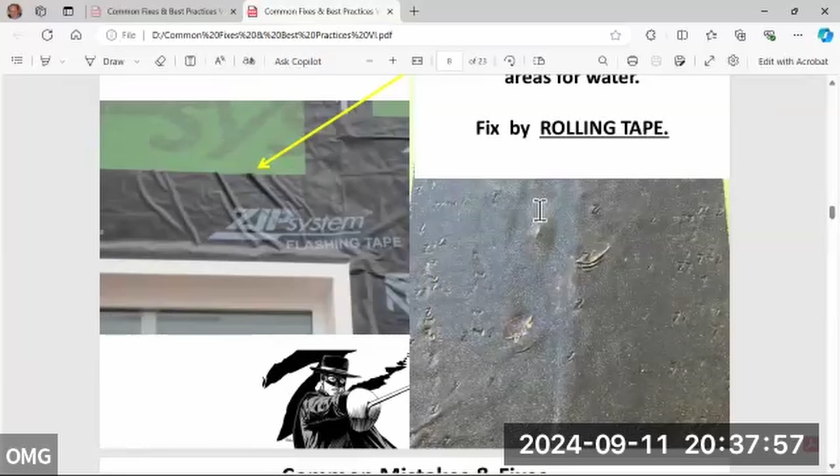These are those fish mouths again. In terms of rolling the tape, if you can see these Z's, it was rolled enough. And not seeing Z's isn't damning all by itself—it's possible to be well rolled and not have Z's.

What were you gonna say, brother? Quick question, saw a spot where they got a little carried away with the nail gun. There could have been 25, 30 nails in the area, and they just blew that out. They watched Scarface the night before. At that point, there's no barrier anymore, right? So what's your opinion—is it bigger than a fist? It looks like somebody just machine gunned it.

Yeah, so there's a bunch of problems that pop up. The first one is, I sincerely doubt it, but it was probably over a portal wall, like a big portal frame, like a garage header. It was probably either there, if you saw it, or somewhere in the floor assembly, where they were trying to hit the ends or pull it in or something—that's where we see that most commonly.

Two things. One, I don't think there's an engineering detail that says what the structural capability of that panel is anymore. And just from a long-term durability standpoint, envelope is important, but structure is also really important. So I would be concerned about the structure as well. That's the first thing I'll say.

The second thing is, yeah, it's entirely possible that you could blow off enough of the stuff that—the good news is you can tape over it. But if it's bigger than a fist, you were talking about cutting it out. If you actually have a gap in the wood, like they Scarface'd this, they went nuts, and there's actual large chunks of wood missing in the panel, then yeah, that's a problem. But if it's just damage to the surface, just tape a bigger area over it.

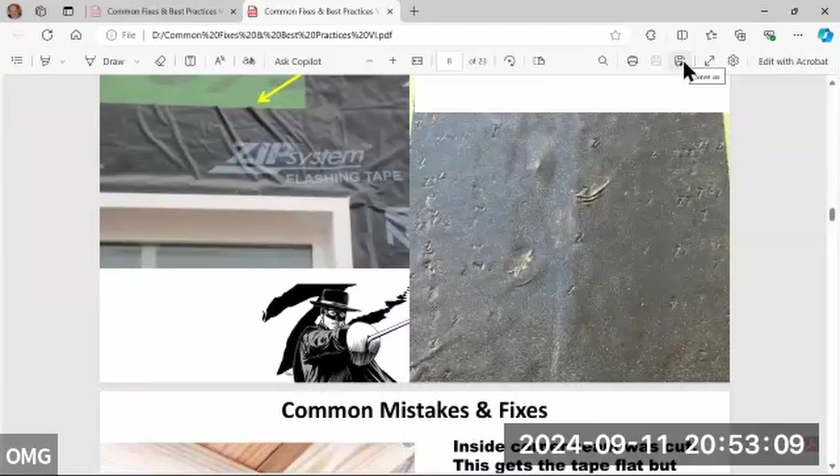Oh yeah, so one of the great things about zip on a roof assembly is it's actually a fairly high coefficient of friction. It sheds moisture really well. It's not smooth, there's little peaks on it, so it's pretty grippy to walk on. That is not true of the tape - the tape is extremely slippery. Not the tape itself, but the backing to the tape. It's like glossy wax paper, pretty glossy. Yeah, don't step on it on a roof. Yeah, remove that.

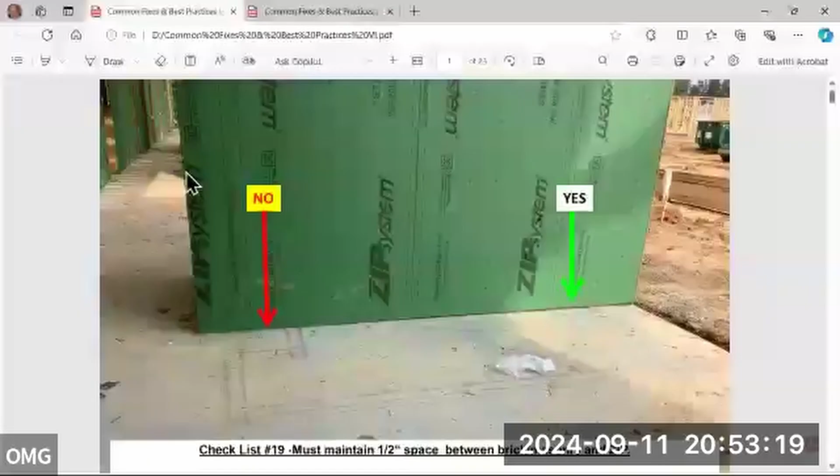Question: when siding goes over the zip system with J channels, does the caulking need to be between the J channel and the window frame? Most siding and window manufacturers are going to tell you that they want it there. I used to work for Hardie - that would have been part of Hardie's installation guidelines, that was the caulk joint.

The reason caulking is a good idea from a WRB perspective is that the thing that kills WRBs is typically UV exposure. If there's a gap large enough that daylight hits that section, it will cause it to break down and fail eventually. That's what those caulkings are for - they're really to prevent that.

It's also to keep a certain amount of bulk water out. Think about the house wrap, the WRB system - zip or house wrap, either one - and the cladding, Hardie, vinyl, whatever. It's like clothes and your skin. If you stay outside in the summer all day, you're gonna get beet red, your skin's gonna blister, you're gonna get skin cancer. So you wear clothes. But the clothes don't keep all the water from getting into the inside of your body - that's your skin's job. So those two things work together.

They deal with the 4 Ds of dealing with water: deflection, drainage, drying, durability. They handle those Ds differently, and they work together to help maintain the integrity of the envelope. So caulking that joint helps keep bulk water out, which means any imperfections in the skin are safe. But it's mostly about protecting it from UV exposure, because that will kill it eventually.

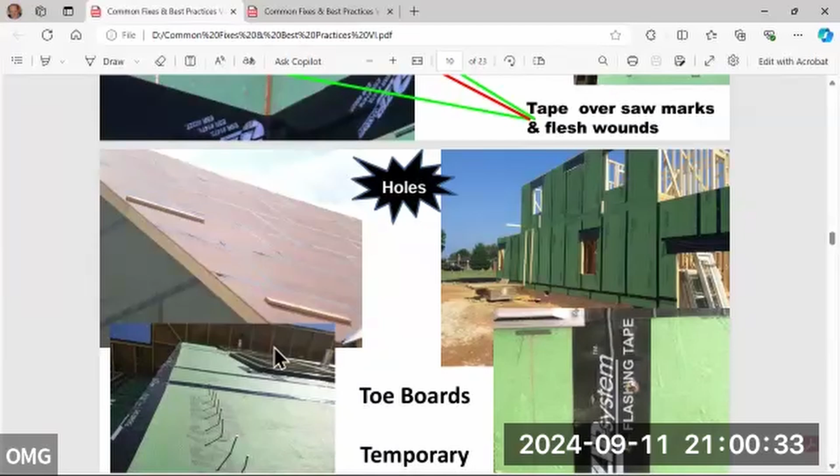So another thing that'll happen is people will miss studs. I'm sorry, I'm trying to be conscious of everyone's time here, but people will miss studs. Those are going to get banged out by the insulator, almost assuredly, and then you end up with holes.

So it's a good idea to walk the framer at least, or if you're doing a bunch of inspections, one of the things it's good to do before you get insulation is walk the inside. Because looking from the outside in, it can actually be pretty hard to see a hole sometimes, especially if there's not a lot of buckling or deformation of the panel around the hole. You really got to know it's there.

And sometimes you'll think that there's just a fastener in it. If you look from the inside out, it is extremely obvious, it looks like someone shot a bullet through the wall. There's like a big old daylight, just looking in, it's black. And you don't pick out those kinds of shadow details the same way you pick out a light point. But if you're inside on a normal day, even if it's overcast, there's just a reasonable amount of ambient light, and you're looking around, you can pick out the daylights all over the place.

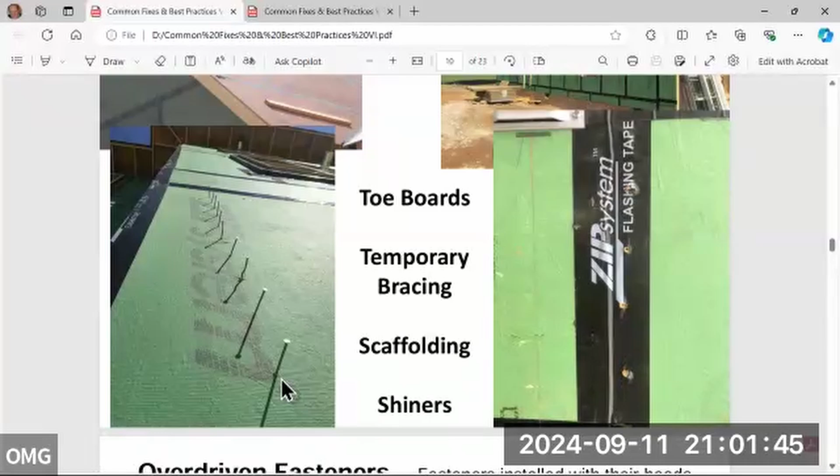It's super easy. Also, if you're walking the inside, you'll see if someone missed a whole stud or missed a lot of a stud. And again, two issues, right? First, there's no fasteners there, so it's not doing any structural work. And the second one is you now have a bunch of potential infiltration points for water, so it's both of those problems simultaneously.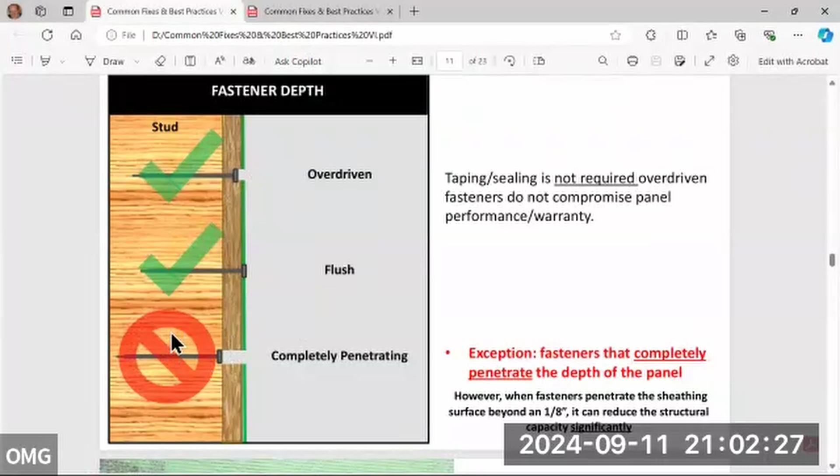This is the same detail we saw earlier. Up to about halfway through, we're not worried about it—it's going to have a structural problem before it has this issue. So if you're doing a Montgomery County or any of the counties with a framing inspection, if the framing inspector passed it without issues, you're probably not going to have that many overdriven fasteners. It's still worth looking at, but it's a good indicator. People say the entire wall, every single fastener needs to be taped. We ask, how did your framing inspection go? Oh, we thought it looked great. You probably have some you got to tape, sure, but probably not the entire wall.

This is just what that repair looks like. Little square tape, done.

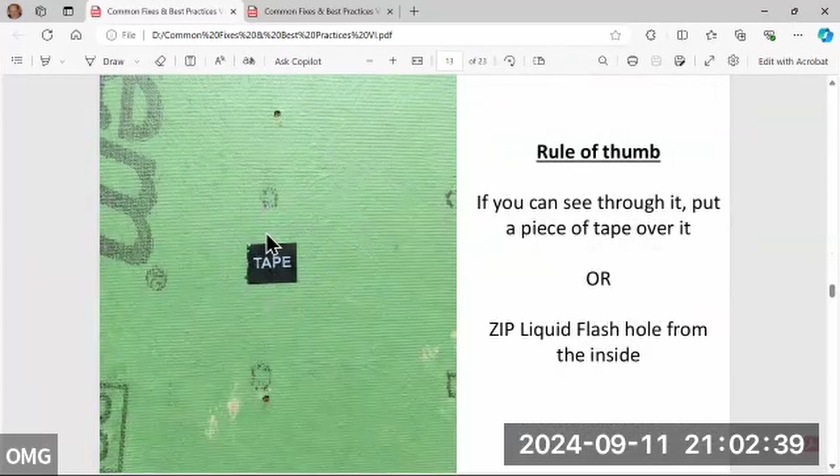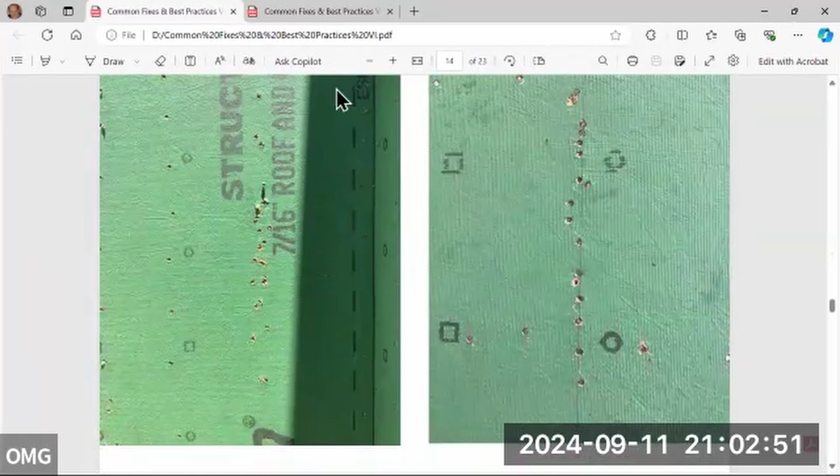Here's your scarface detail you were talking about earlier. Someone just went bananas—there's no engineering detail for the load carrying for that section of wall. You might seriously think about just removing it and replacing it with a new piece, then taping those in. Deal with these big holes, anything bigger than a fist.

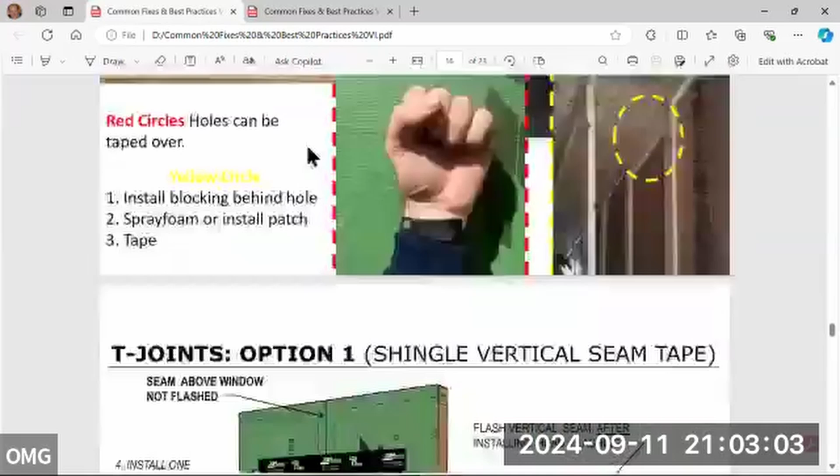Definitely the best way to deal with this thing at the top is to have them just cut out the top section to begin with. It's so much easier—just cut out a section, block it, and put in a new piece.

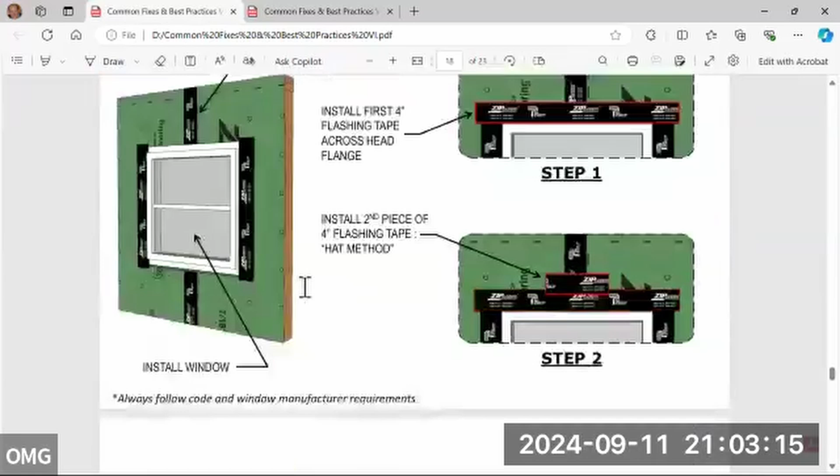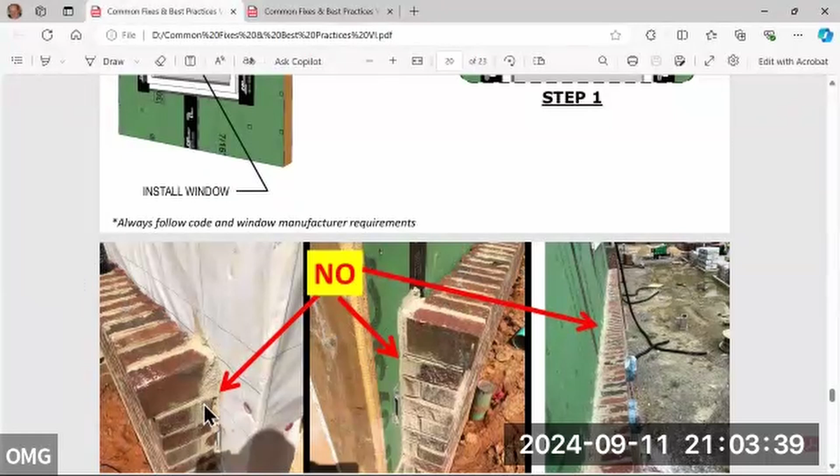A lot of this is going to be redundant from what we just went through, so I'll scroll through it quick. One other thing we see a fair amount of—whether it was us or Tyvek or Typar or whoever, none of the WRB manufacturers want brick walls terminated back to them. So there's a gap here, right? There's a gap here, but they got to the end of that brick wall and they wanted to return it, so they return it all the way back to the house wrap. Unless there's two layers there, you can't do that. It will be a failure point at some point in the future.

This is pretty common, especially on houses I used to call lean-to—the front of the house is brick and the rest is wrapped in plastic siding. They'll come around the sides a little bit and wrap it around. So looking at the front from the street, it looks really expensive, but you walk around back and can't tell the difference between a $1.5 million house and a $400,000 house. When they do that, there's usually an area where they have to terminate the bricks back, and keeping an eye on this isn't bad because it's more common than most people realize. It usually takes place in between our observations—we'll see when windows are in and might see later, but we aren't going to be here when this is going on usually.

Brick ties, they be taped? So you don't have to tape them—we don't require it. It's also very difficult to tape metal strapping that has multiple fasteners through it. It'd probably be a little easier to apply a fluid applied product to it, since it'll get into all the nooks and crannies easily. The biggest issue we have with brick ties is when they're used with zip R sheathing, because zip R is wood panel and stud with a void in the middle. The brick ties are supposed to go back, but with regular zip, you can just install the brick tie straight over it, nail through it, and you're fine. It's the same for all the fasteners for cladding—you're going to install fiber cement or vinyl siding and put tons of holes in that, but all those holes have a fastener in them, so they're not a problem.

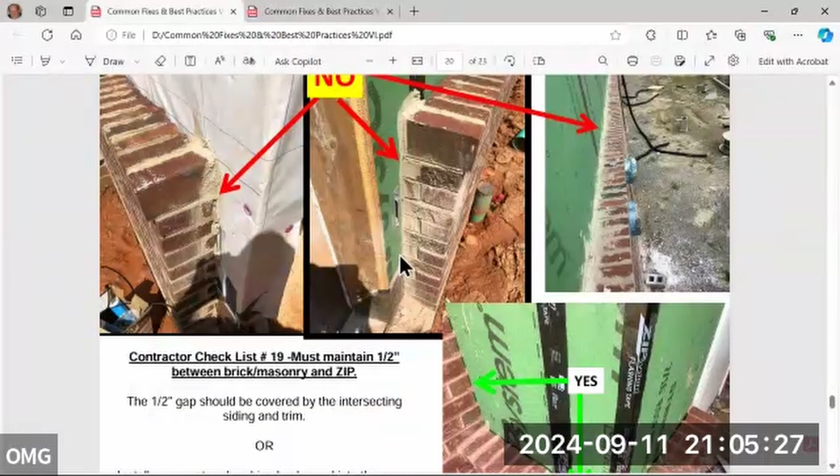So liquid flash and fluid applied are synonymous terms? For me, yes—I apologize, I should have clarified that earlier, but yes, I use our fluid applied liquid flash system. It's one of two ways I refer to it, but yeah.

We talked about this in the last presentation as well, having these joints taped is a really good idea. My favorite detail for this is you tape the joint first, then install whatever flashings you have, and then tape over the top of the flashings.

The number of things that have to fail going down are significant. Another good detail here is if you have an ice and water shield, run the ice and water shield up onto the wall as well.

Tape the uphill side of the ice and water shield if you're going to do that. You're just creating layers, because as a former roofer and siding guy, this is one of those places where you have leak issues all the time. The first four issues I had with zip installs, someone said my zip's not working, come take a look. All four were this detail, and they were all house wrap tape instead of zip tape from the roofing installer.

This is one of those areas where there's a lot of bulk water moving, and if it's not done correctly, and you also have two different installers—your roofer is very seldom the same guy doing your siding, and usually neither of those people is the framer—you have three people working together in that area, and all of them have to have done it correctly, or there's a water entry. But they blame the roofer.

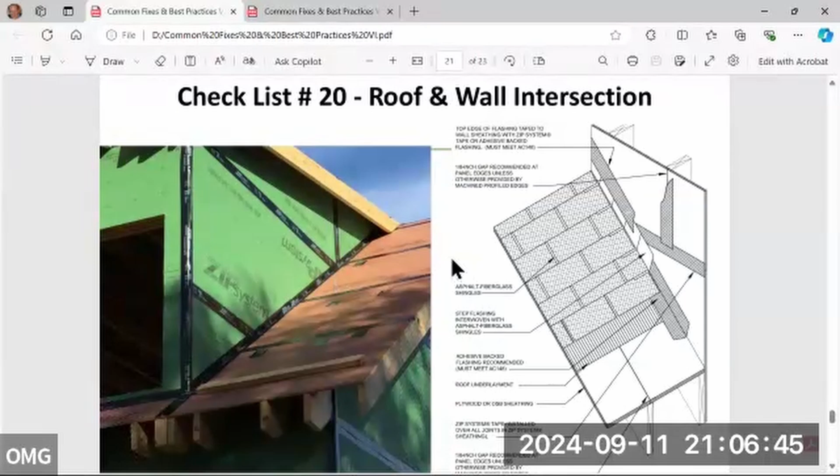When you have these bolted-on things, like a deck ledger or a bolted-on porch roof, it's very common for them to frame out the house and then bolt a deck roof on after the fact, even with trusses. You want to do a tape beforehand.

Now, is it ever going to leak up in here? Ever? No, not really. The roof would have had to have failed—you'd have way bigger issues if that happened. But it's part of the air barrier, and you want the air barrier to be intact for indoor air quality, for making your blower door test scores, and just for energy efficiency reasons.

Taping the entire zip wall and then bolting all of these vestigial framing things on the outside is a really good idea. It's definitely an area I see new builders miss on—they think, oh, this is just the WRB, so I don't even do it in there.

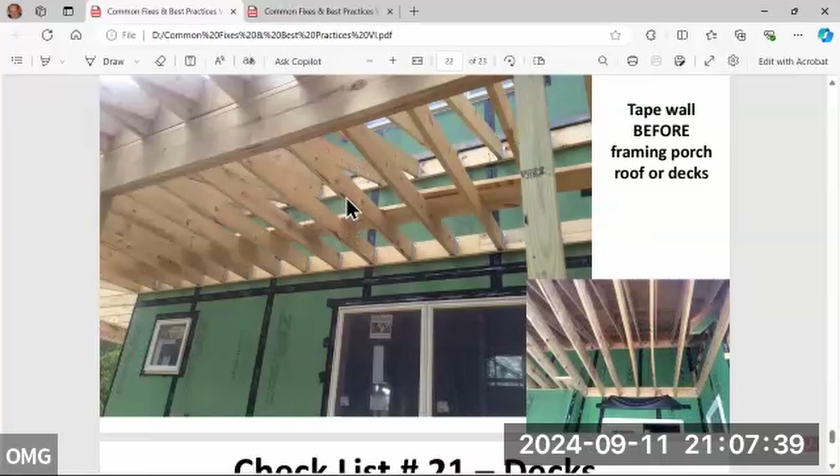It's just a structural panel behind there, doesn't really matter if it's WRB. It doesn't have to be WRB, but it is the air barrier, and the air barrier does need to be continuous.